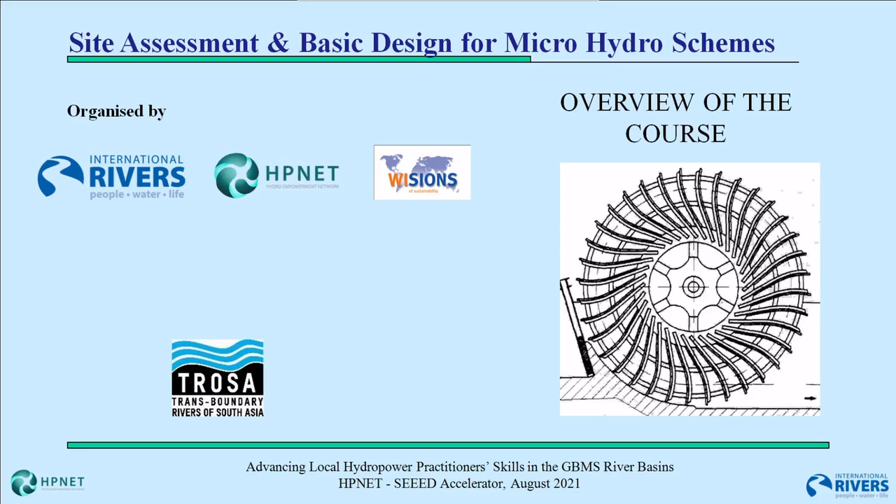The recent IPCC report says that the globe is nearly a degree warmer than it has been at any point in the past 2000 years. That's a very scary situation. We can see the effects already across the world. Wildfires in USA, Canada, Europe, Turkey, floods in Germany, Japan, changing rainfall patterns all over the world.

As the world is facing a severe climate crisis, a lot of attention is on alternatives to fossil fuels. Renewable energy technologies offer some hope. Of many types of RETs, hydropower is the oldest known RET and one of the most efficient options. A lot of large hydro schemes had been built over the last 200 years with huge storage dams. While the energy generated is renewable, the side effects are terrible in such massive large-scale projects.

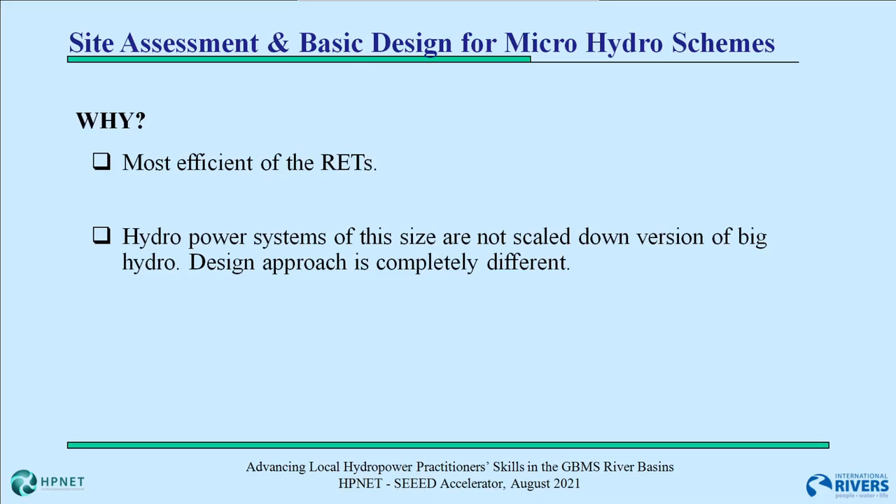Fortunately, we can design micro or pico-sized hydro schemes too without the ill effect of large hydro. To do this, we need to change our approach to the design. Over the last few decades, a lot of work has happened on not only improving system reliability but also to simplify the manufacturing process so that this can be easily adopted by remote poor communities.

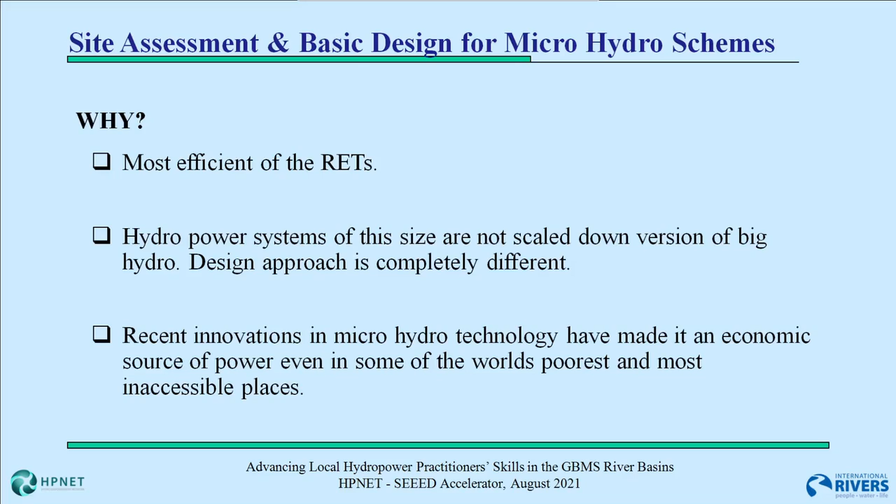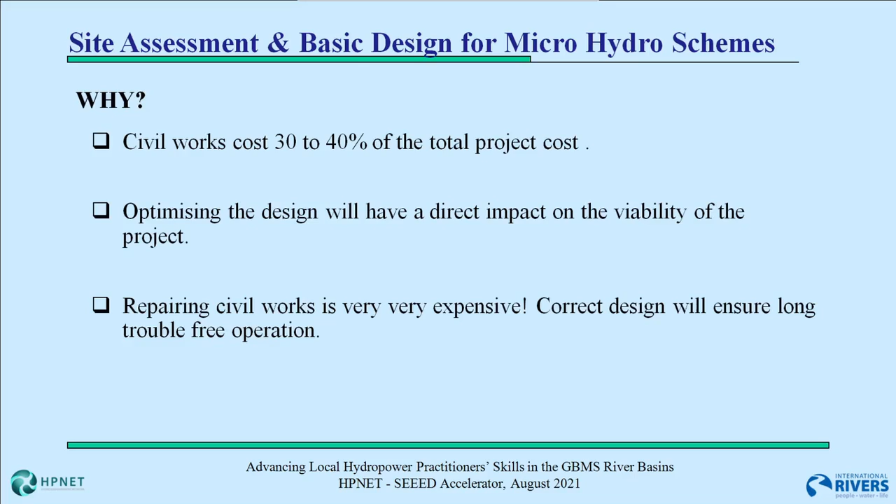In a typical project, cost of civil works can be as high as 40%, a significant part. So, a proper design is essential to minimize the costs and maximize the energy output. Repair of civil structures is very difficult. Try to break a concrete block. It has to be designed to last long or should be designed to be repairable easily. To design a good civil work, we need good site data. Poor site assessment will end up in bad design and will make the system more expensive.

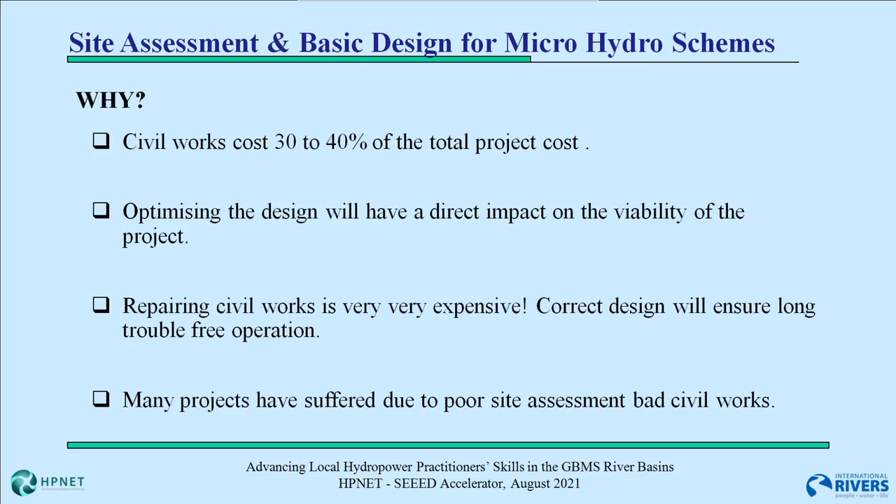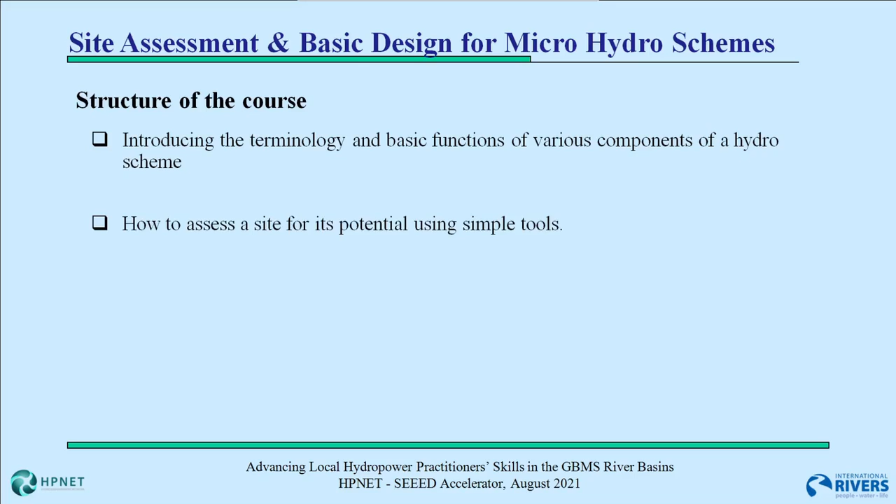What we are going to do in these 3 days is we will list out all the essential components that make a microhydro work and what their roles are in the scheme. We will learn simple but very effective methods of site assessment like measuring flow rate, height, etc. We will also touch upon optimum locations and sizing factors for some components. Tomorrow, you will visit a site, apply the assessment methods, collect data. On the last day, we will work together to analyze and use the data to arrive at design conclusions. That is the overview of this training course.

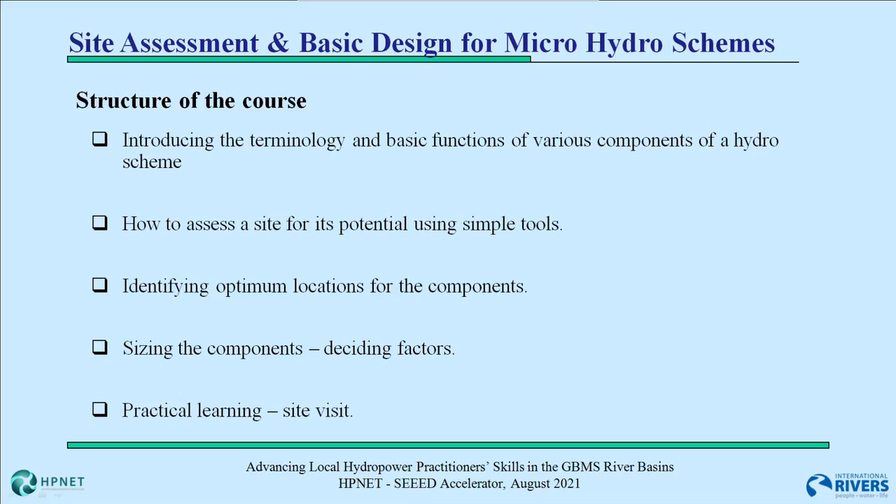We have tried to make the course as interactive as possible. Breaks like this will help to reflect on topics covered. Please click on the link on the chat window and answer the questions.

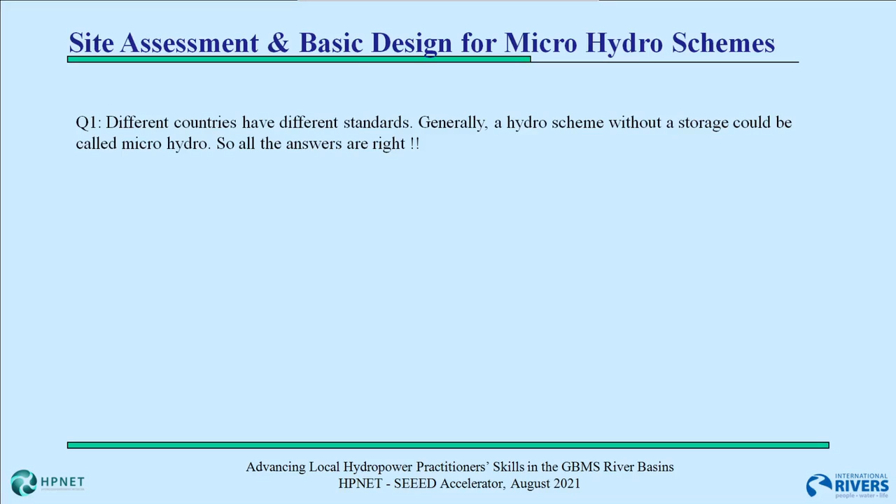Let us quickly look at the answers. Different countries have different standards. So generally, a hydro scheme without a storage could be called microhydro. So all the answers are right. Answer for the second question is, more the data, better the design. Less margin for errors.

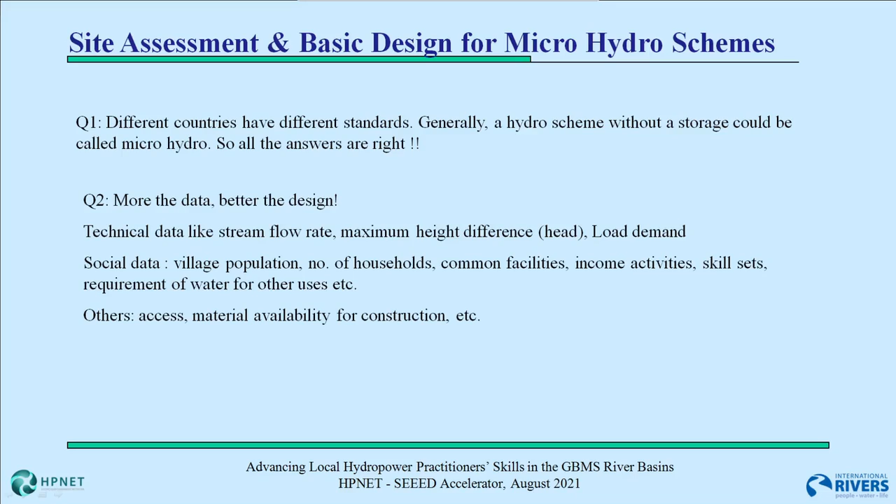Technical data like flow rate, maximum height difference, in our professions we call it head, load demand, etc. These are technical. Then you have social data, which can be village population, number of households, what are the common facilities, income activities in the village, skill sets that are available, requirement of water for other uses. These are some of the social data. Access to village, material availability for construction. These are some others.